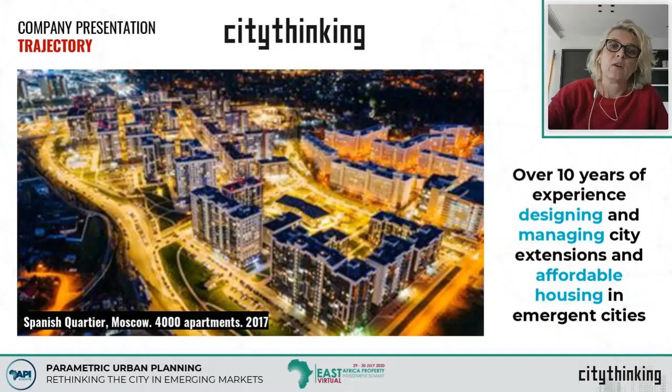City Thinking is an international company. We have our headquarters in Spain, and we also have a representative office in Moscow. Over the last 10 years, our company has been concentrating on finding an answer to how to design and manage new city extensions related to the big demand for affordable housing in the coming years in emerging countries. In order to do so, we bring together research and cutting-edge technology into new ways of designing cities. We work for a digital transformation in the construction industry of the new urban area. This means going away from the traditional way of construction to an industrial approach and off-site production.

We also concentrate on controlling the whole design and managing process at all the different scales of this project. This means starting from the territory to the kitchen. This is an integral, global approach, which helps us not only cut time and cost significantly, but also involve all the different stakeholders at the same time.

We all know the challenge to tackle in the next 35 years is that the urban population will increase by 1.5 billion people. This will mean that in the coming decade, $4 billion will be invested in the construction of new residential districts.

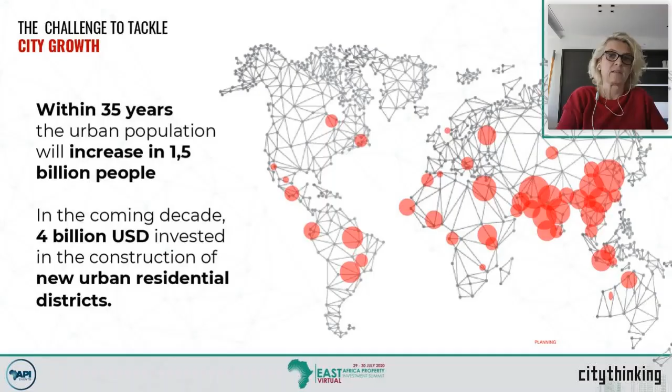Nowadays, this management presents one of the biggest opportunities for the social, ecological, and economic development of our planet. In order to tackle this challenge, we have to take into consideration multiple factors: economic, ecological, social, functional, in order to control them at the same time.

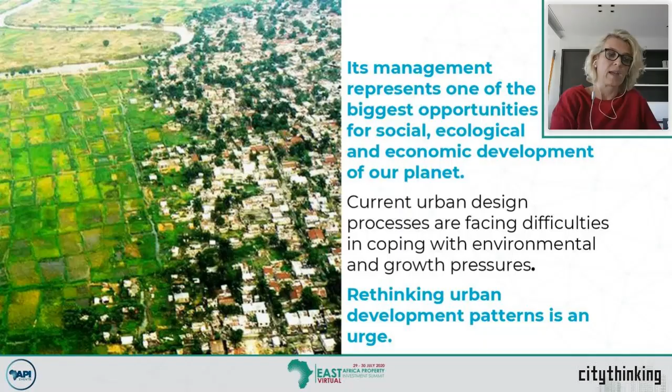Today, the current urban design processes are clearly facing difficulties coping with this environmental pressure and this growth. It's very important to rethink the urban development patterns. We always say it's very important to go for a scientific approach. The traditional way of doing city extension or urban planning is no longer able to cope with this new area.

On the other hand, in order to narrow the affordability gap, because this new city extension is always related to a big demand for affordable housing, we have to take into consideration the four following points, which I can show you in this graphic. There are four points which are very important to consider when doing affordable housing projects

in emerging countries and everywhere around the world. One point is the land. It's important to look for the right position, to have a good connection to the existing city or to existing city extensions, in order also to lower the cost for infrastructure.

Then a second point is the development. Development is important to think about how you can reduce the cost of developing those houses. It's important to have a critical mass. If you work with a critical mass, you can apply an industrial approach, and this industrial approach will help you control the time and cost of your project significantly. As we said before, this helps you go away from the traditional way of constructing to an industrial approach and off-site production.

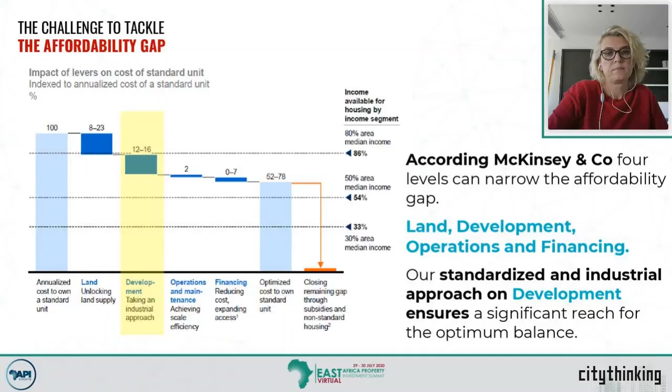How can you do this? This is a project I'll show you here, where you can see the different steps we have to take into consideration. There is a step from the territory to the kitchen. So, based on when we start with the first sketches of how to think about these new urban extensions, we already have to take into consideration what will be the final product.

In order to improve or optimize this industrial approach, we have to work with a standardization process and a modular approach at all scales and in every construction stage. Things have to fit together. So from the master plan to the final layout of the houses, it's one goal, one design process. This also helps us in the future to be very flexible and adaptable to future market changes.

What does this mean? These types of projects are normally not developed in 5 years. If we talk about city extensions of 100 hectares, 200 hectares, we are talking about 15,000, 20,000 units. So when we start with the first stage, the market is prepared for a certain product.

But when we finalize the last stage of the project, the market certainly had changed. This new approach of working with a modular and standardization process will help us adapt fast to changing market conditions, because I can interchange different models and receive a different product mix on the market, based on the same models I already designed at the beginning. So this is not only very efficient, but also very flexible.

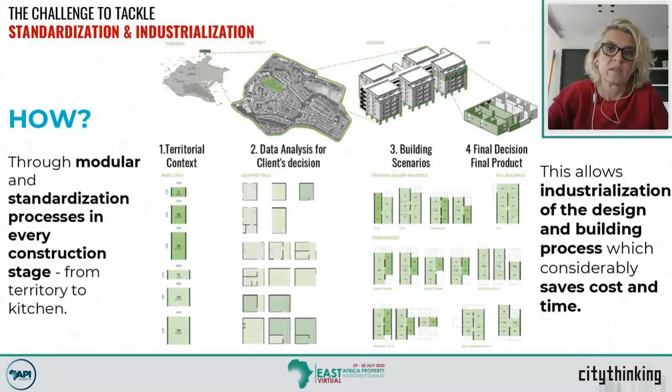As said before, we need to find an answer for how these new cities have to look. This is why we apply the principle of ecosystemic urbanism when working on these kinds of projects. This is a system developed by BCNEcologia in Barcelona, working with different KPIs: social KPIs, functional KPIs, ecological and economical KPIs.

This urban system is based on four pillars. First, the city has to be compact according to its morphology - less land consumption, less distance from one place to another. Second, the city has to be complex in its organization - no sleeping cities where nobody can work or go shopping. It has to be complex in order to fulfill the day-by-day needs of the inhabitants.

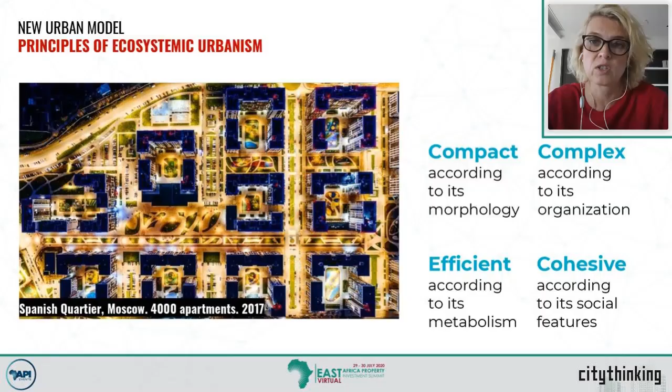It has to be efficient according to its metabolism, and it also has to be cohesive according to its social features. This means we cannot make a new city for only one focus group - we have to mix them. It doesn't help to have a new city extension only for the lowest income group - there will be no buying force, no commercial activity on the ground floor, because people won't have the means to maintain it. So social mixture is very important when considering these new city extensions.

How can we control this? These are different factors and aspects that are important to ensure it will work. This can only be controlled if we measure the different KPIs and control them at the same time - the functional KPIs together with the ecological KPIs, together with the social KPIs, and together with the economical KPIs. Because we all know if these projects don't fit into the budget, they're not feasible at the end.

So what you see on this slide is a project we completed in Moscow, called the Spanish Quarter. It was finalized in 2017, and we won the European Property Award for this project. These images show a small selection of the KPIs and how they were measured.

There are points we measure, like the corrected compactness - how compact are the different stages of the project? How many apartments per hectare? What is the public space we can find, and what is the difference in that public space? How can different public spaces attract different activities?

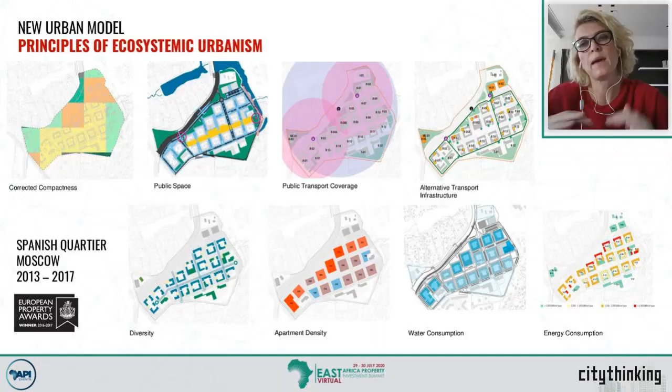Infrastructure cost is an important point when we talk about new city extensions. The diversity - how many different uses can I find in this development? Are there offers for workplaces, for shopping, for educational facilities? All these different KPIs have to be measured and balanced against one another.

So this is what we do with our system of ecosystemic urbanism. We have multiple variables that help us model different scenarios, and we can balance these scenarios against each other. By optimizing the KPIs, we can find what's most optimal across all four pillars. It's not possible to fulfill everything 100%, because some things are even contradictory, but the big challenge is to find the best balance between all four.

And in this way, you can have a compensation between different factors, which maybe will not be able to fill 100% all of them.

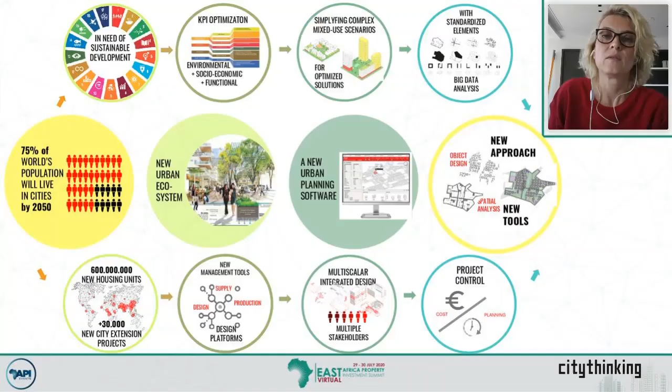This is like the new approach we would like to present, or we would like to defend. But how can we do this? I mean, this is only possible if we go for a digital transformation. It is not possible to control those issues in a traditional way of designing and managing the cities.

So in order to be able to do so, we need a design platform and we need management tools. This is also why we had been investigating through the last years how to develop a software which is able to bring all these factors together, to control, to balance, and to be able to adapt.

Because what I said before is those planning, what we are doing, is normally not an issue of 5 years. It's an issue of 20, 25 years. City extensions are huge. The market is changing, the requirements are changing, and what we are doing today needs to be adaptable to the future demands.

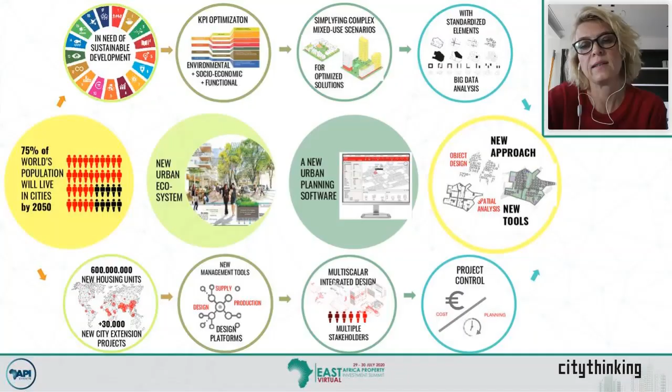So now I would like to show you a little bit about this program and this tool we are working with. This tool, we call it PSP. This stands for Parametric Smart Planning. This Parametric Smart Planning is working on the different scales of the project.

It works on the urban development, and it also works on the housing development. This means that we are working with standardized elements in the urban design, and we're working with standardized elements in the housing design. All the different scales are coming together in this one goal approach. Let's call it like this.

So this tool is able to analyze, generate, optimize, and visualize those complex urban scenarios. It is able to consider the functional, environmental, and social KPIs as well as the economical ones. And it helps to industrialize the planning and construction process for massive affordable housing.

What is massive? Massive is a minimum mass in order to be efficient to work with this approach. What is the minimum mass? The minimum mass is between, let's say, 1,000 till 3,000 and more, always possible, housing units. When we start to work from this number, then this approach is effective, is feasible, and is very efficient. Let's call it like this.

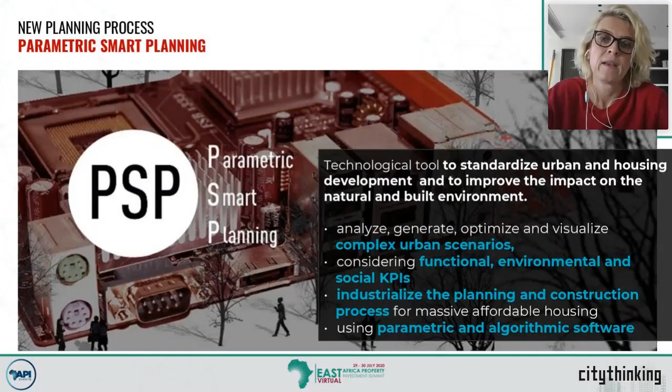So this tool is working in different stages, in different phases of the project. Stage one, we have to control the existing site. This is a tool that is adaptable to where we work.

As I said before, our main market at the moment is Russia, but we're also working in other countries. So it's very important that the tool adapts to the specific conditions of the surroundings and the site. This means we will need to program and let it know where we are working. Sun requirements are not the same if we are working in Moscow or in Nairobi.

In Moscow, you're looking for the sun. You would like to have as much sun as possible. The more south you go, people are trying to hide. The same here in Spain.

So geographical data is one of the main issues. This will also mean that this approach is global, but obviously it has to be adapted, and this is what we always do, to the special local conditions, not only on the climate, also on the culture.

People don't use the same way to live together or share their time together on the different cultural level. So this is also something very important to take into consideration, and we always do this by very local research, let's say.

Okay, so the first step when we work with this parametric smart planning is really important: to have all the features of the site. This also means where are the connection points to the surrounding streets, where we have existing water courses, where are green areas we would like to take into consideration, if there is existing building you cannot demolish, etc.

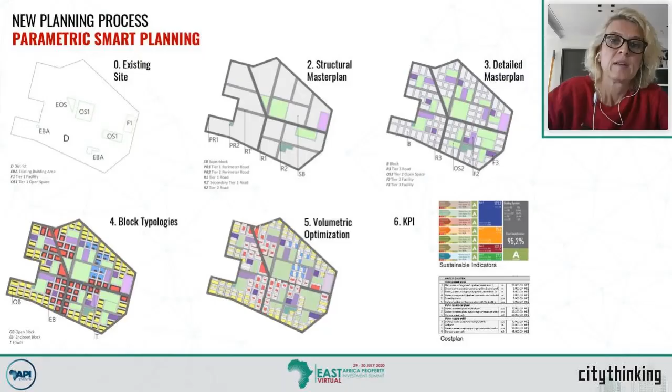So by optimizing these different KPIs, we get the optimization of the final master plan, where you can already see the housing project implemented. I will show you later a small video where you can see how this software works and how this step-by-step process goes, in order to have a first idea. If you go to the next slide, we can see some screenshots from the program, showing the different KPIs we are measuring.

It's just an example, very similar to the ones you saw before related to the Spanish Quarter. You can see we have been working there with this program. So there is a map of distances, a sunlight analysis, a map of connectivity, of covering of the public facilities, of compactness, etc. In total, we are controlling between 50 and 75 different important KPIs by doing this kind of development, and we bring them together in order to balance.

Normally the process is always running through different scenarios. We will never get the optimum scenario on the first shot, but we can correct, give more importance to one aspect, another importance to another aspect, and see how we can get the best result for every specific project we are dealing with.

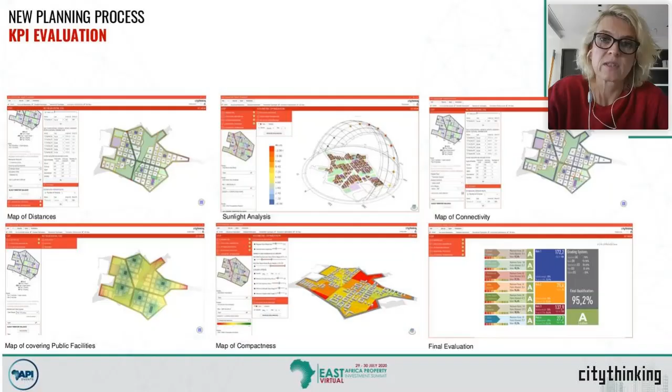So I will show you now a video of how this software is working. I will speak a little bit, and it's running fast. I hope it's better for you to understand it this way.

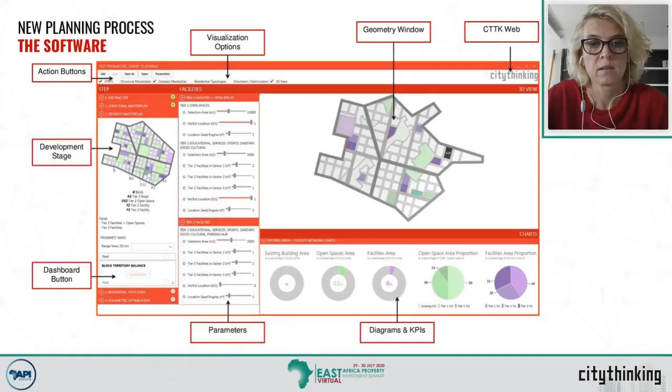Okay, this is a plot you saw there. This is a project we did in Hamburg, Germany.

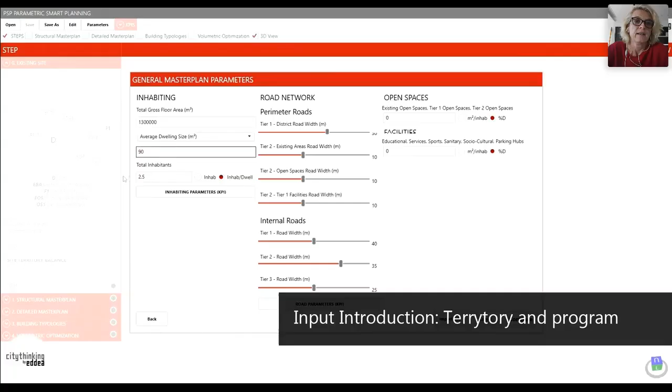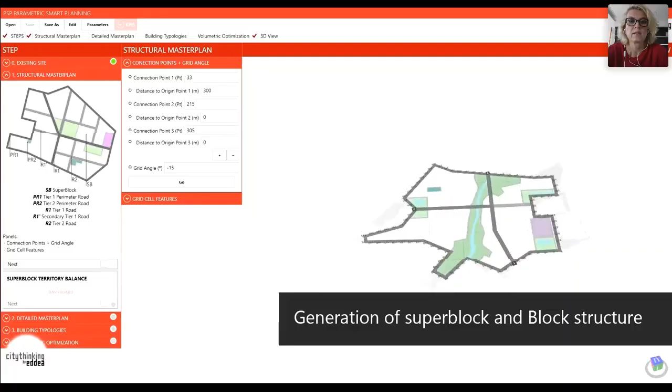First we have to introduce all the data from the site, related to what I said before. You can see there is a green area, a river course running. Once we have this, we have to work out a structural master plan. It's important to indicate the connection points. And as said before, the software is able to generate a block structure and a super block structure.

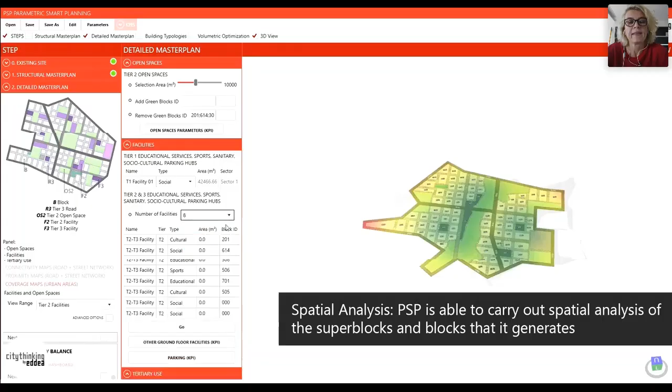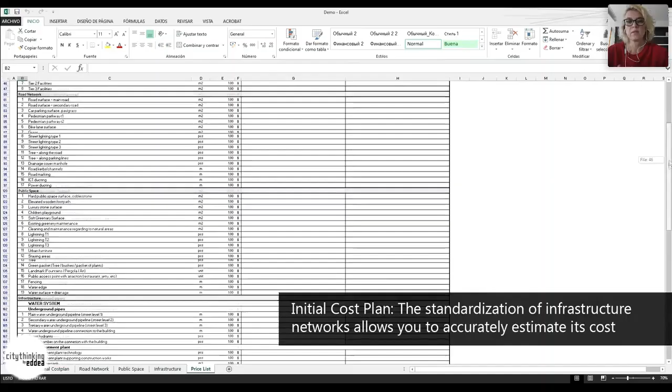At this stage, we are already controlling different KPIs, for example the distance to the different facilities, that everything is related to the right green areas. Also at this stage already, we are able to control the infrastructure cost. We are able to control this at this moment. It's running fast, this video.

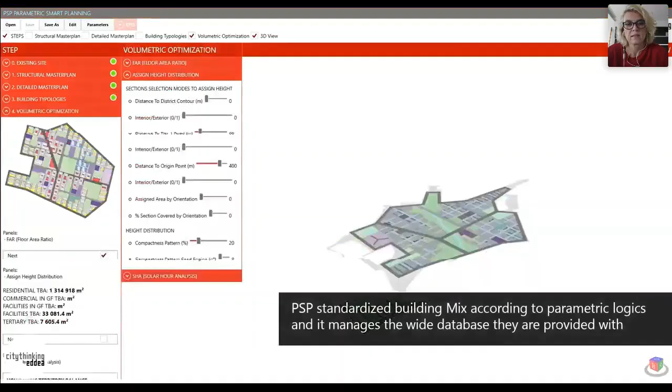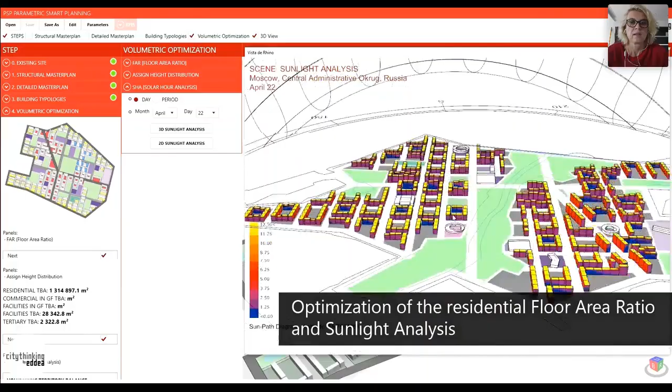Now you can see how we apply the different building types which will be implemented. This is based on this modular approach. These buildings are all based on this modular standardization approach. This is a sunlight analysis in order to fulfill that the sun is controlled in every corner.

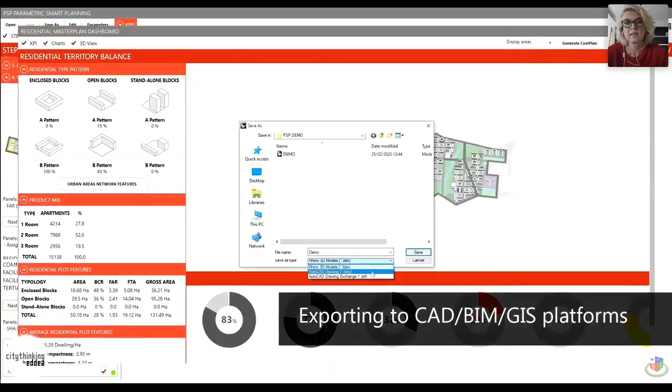And I told you there are always a lot of data which need to be controlled, and output data you can ask the program in real time. You can export this to BIM, AutoCAD, and GIS. And this is one of these indicators you can see we are controlling - this is the compactness, and this then the balance. You are able to get a certificate of this.

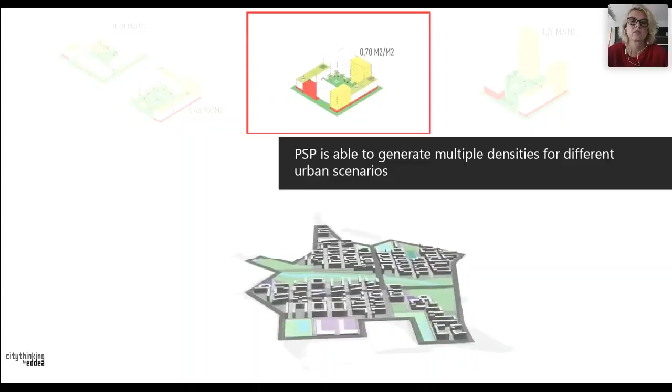You are able to work with different densities of urban scenarios - can work with high, medium, and low densities, depending also on the different sites.